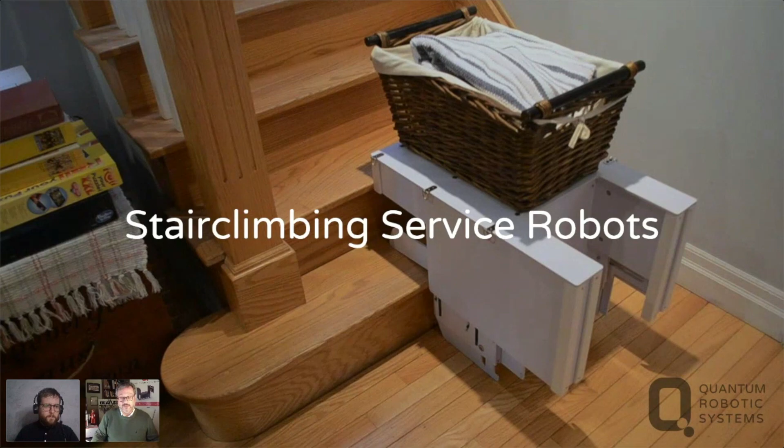Okay, so that's the topic I'm going to be discussing today, and the focus of our company is actually stair climbing service robots. So aptly enough, that's the name of the slide.

I'll give you a brief introduction to myself and Quantum Robotic Systems, about our history. I'll talk about our development history, because it's kind of taken a circuitous route, mostly because of the pandemic, and I'll explain what I mean by that. I'll talk more about our robotic stair climbing assistant, or Rosa.

You saw a picture of her at the opening, and that leads into the discussion of our newest robot, QB, a multifunction service robot. I'm going to take advantage of the captive audience to do a shameless plug for our ongoing Kickstarter campaign around QB, hope no one minds. And then open the floor for some questions.

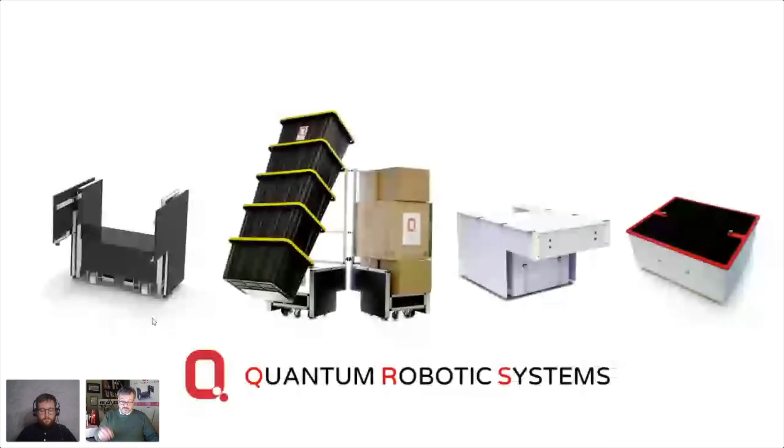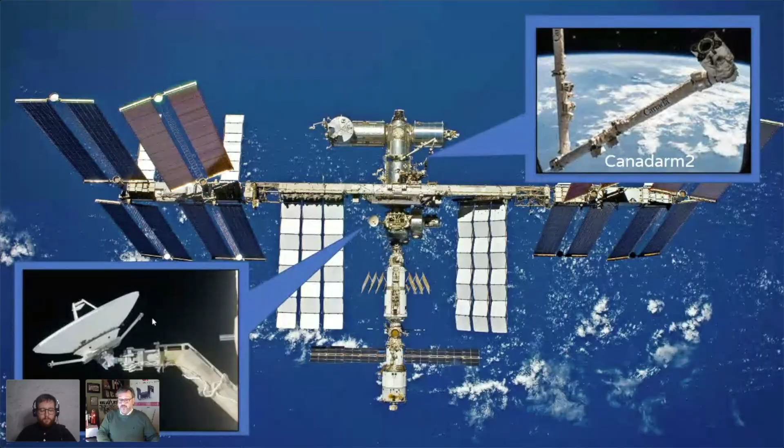After spending some time in the consulting wilderness, I had an idea for a stair climbing robot, and this is actually how I envisioned it. I put together this little video.

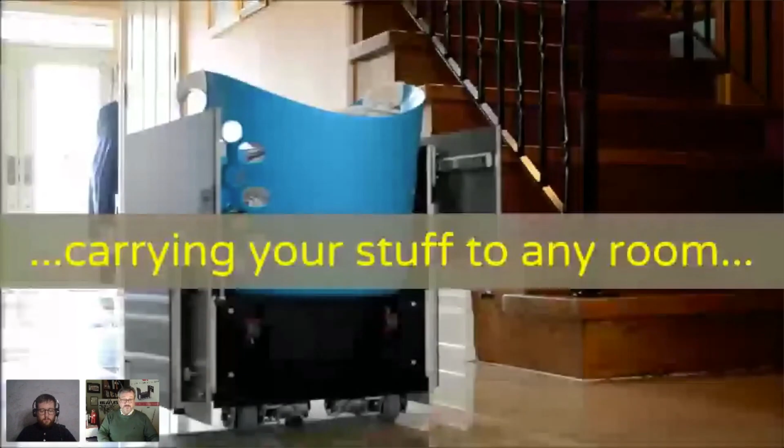This is actually one of our proof of concepts. But imagine a robot that actually greets you at the door, takes your stuff anywhere you want, including upstairs. So here it is taking some laundry upstairs for you. On that idea, the company was founded.

So a little bit about our development history, going from that initial idea. Again, our focus is on stair climbing service robots, and there are really two pieces to that equation: the stair climbing part and the service robotics part.

Our initial focus was on solving the problem of how do you climb stairs in a novel way to keep the payload level, and do it in a way that is basically mechanical, the simplest possible way that you can climb a set of stairs. So that was the challenge we set for ourselves.

And our first proof of concept, here it is, Step-E, is what you saw in the initial video. This was to prove the concept of the stair climbing mechanism.

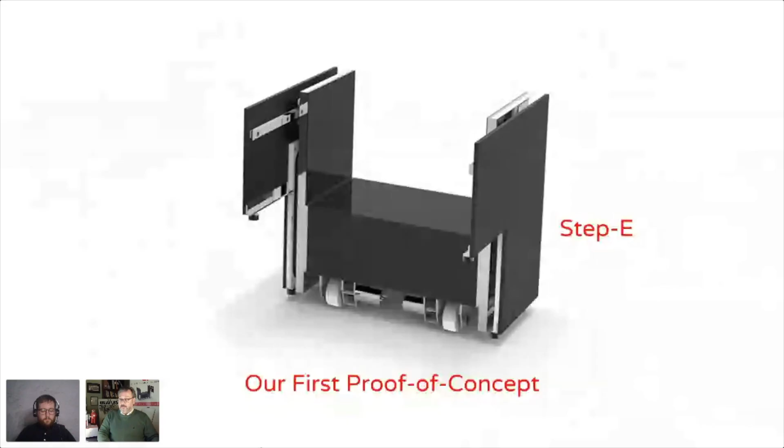We partnered with George Brown College here in Toronto, and they have an excellent Office of Research and Innovation. We've gotten together with them on a number of cases to develop prototypes.

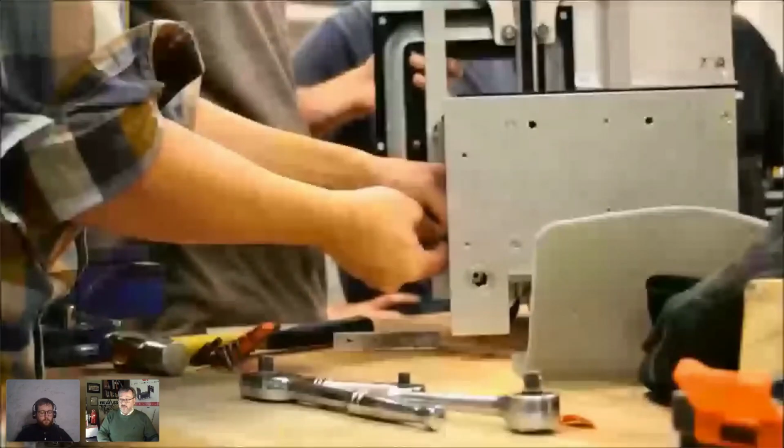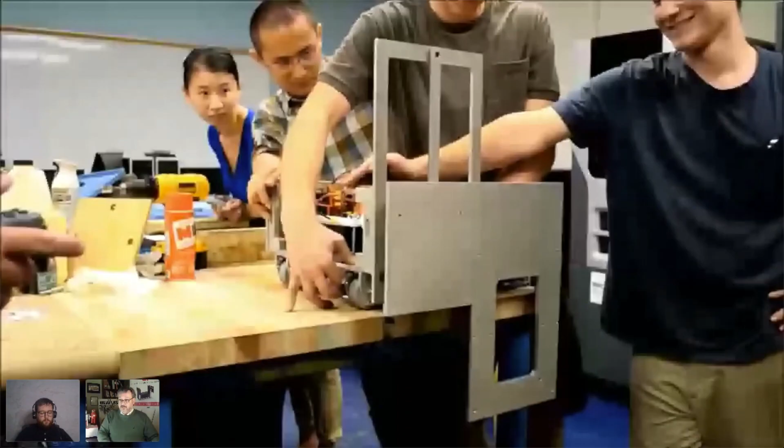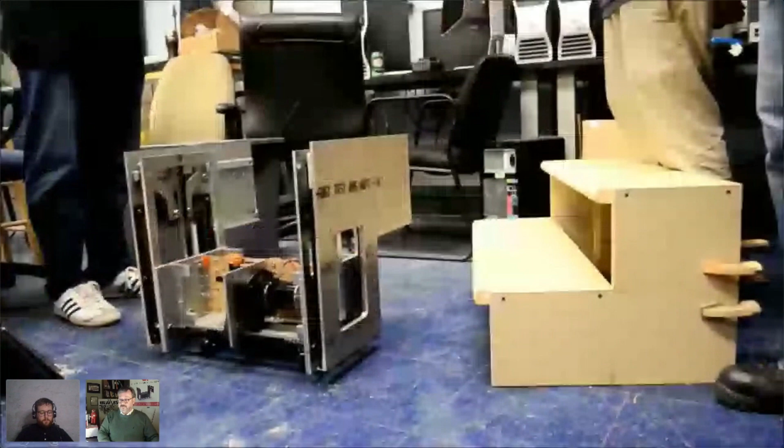So here's the development of the Step-E unit. This is the first time it was actually turned on, the first time it was tested, so it's literally taking its first steps in this video. This involved some third-year college students who did the machining and the integration. So yeah, this is a successful proof of concept of how our mechanism works.

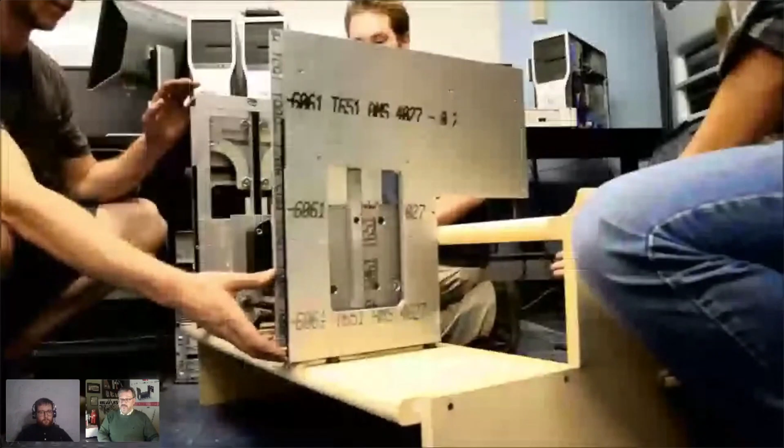And we took that and we've since patented it around the world. So our stair climbing mechanism is now the basis for a series of patents.

The real challenge here is when you're trying to develop a service robot that can potentially be used in someone's home, you're faced with a competing set of requirements that don't overlap necessarily. It has to be a capable robot, autonomous and useful, but at the same time small, compact, easy to use, and most of all affordable. The price point is a big hurdle—if you price it out of range of most homeowners, that market is shut off to you.

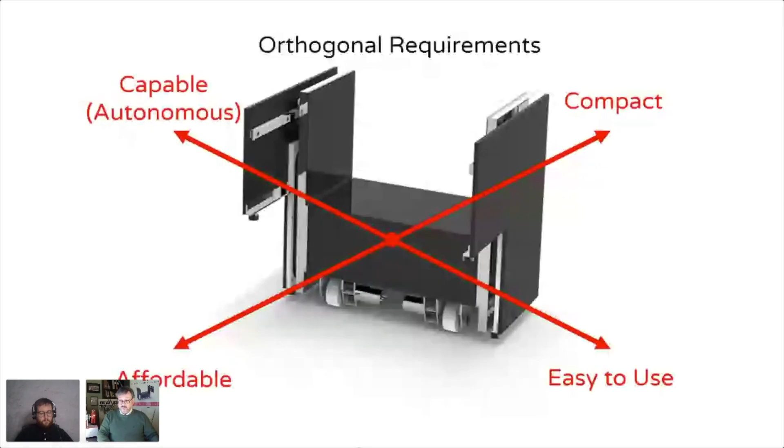So at first when we looked at this, we thought it's a really hard nut to crack. What is our minimum viable product after we develop this mechanism? So we decided to focus on the stair climbing part, not the robotics part. We put the robot aside for a while and decided to focus on the mechanism.

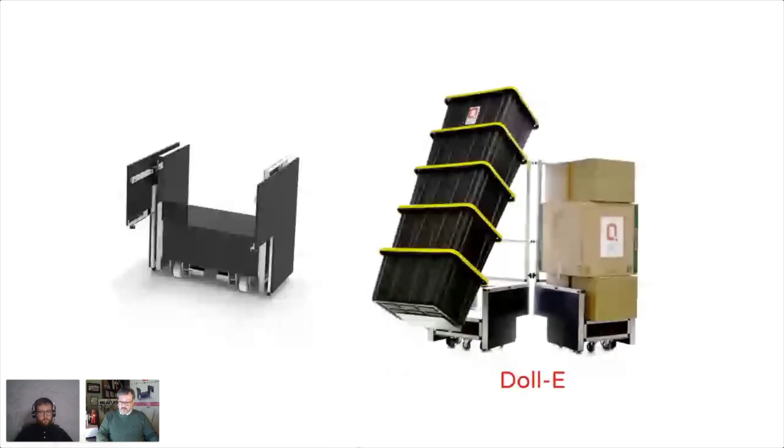This is Doll-E, a stair climbing moving cart. We took the mechanism we developed in STEPI and scaled it up to see how much we can lift and how much we can help people in the delivery industry, the moving industry, and logistics. I have a video that shows you Doll-E going through her paces.

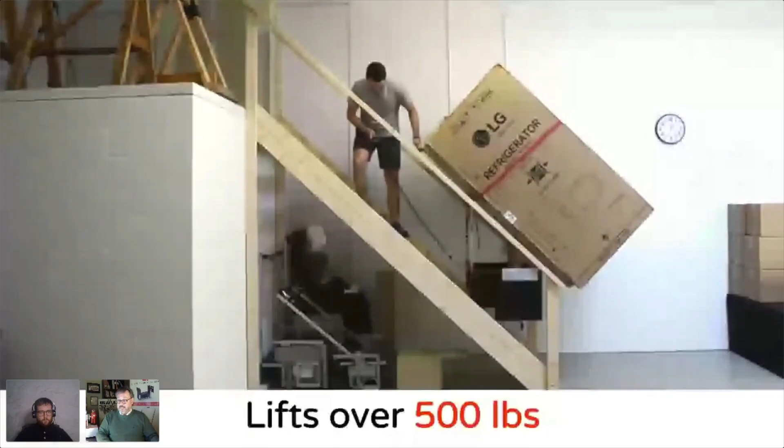It's meant to roll like any other cart, except when you get to a set of stairs, it climbs. And it's meant to carry pretty much anything, including a refrigerator in this case. We tested it up to 500 pounds.

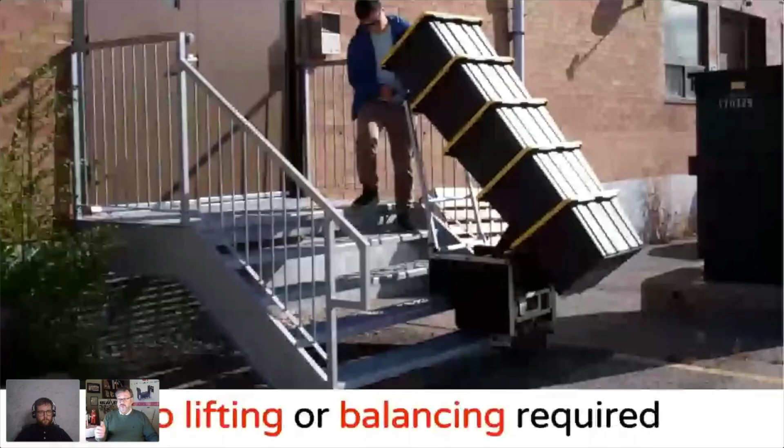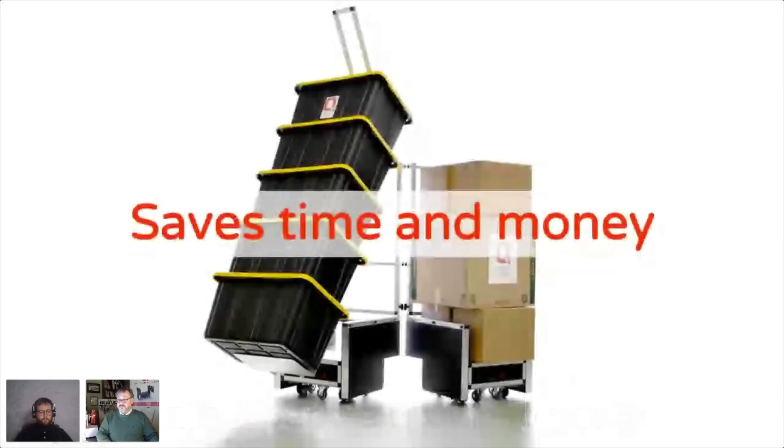We were able to demonstrate that the machine can save a lot of time and a lot of injury, and our primary focus was the moving industry. We showed business cases to a number of large companies, showing that they can cut back on their crew sizes by a factor of a third. And it saves a lot of downtime.

One of the biggest problems facing the moving industry is labor shortages related to injury, and people not coming back to work because it's just too tiresome a job. It's just too brutal—you have people barely 30 going in for back surgery after working in this.

We were all set to go. We had lined up our initial customers in the moving industry. We were about to negotiate shipping units, and then that happened—the pandemic hit, and basically the bottom fell out of the moving industry.

It's really tough to move when you can't get into people's homes. Talking to the president of the Canadian Association of Movers, I think at the beginning of the pandemic they took a 40 to 50% hit. So nobody was buying any capital equipment, nobody was interested in evaluating a new robotic stair climbing cart.

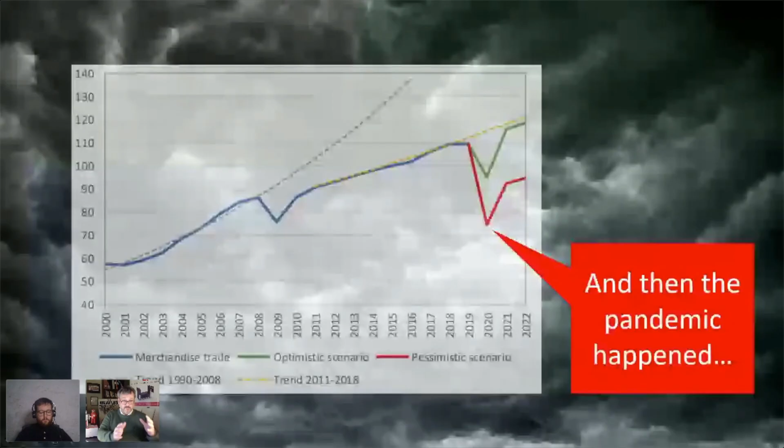So Dolly was put into pause mode. And what do you do when that was your first minimum viable product to launch into the market? Well, you do what everybody else does, and you pivot. We had our robotics work on the back burner, and we quickly moved it to the front burner, focusing on the other side of that equation—making a good robot.

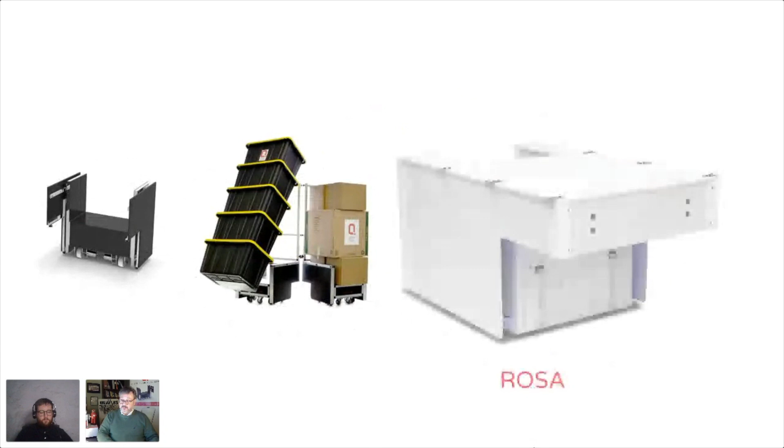So along comes our next prototype, which is our robotic stair climbing assistant, or Rosa. We developed Rosa primarily for people who need help navigating their stairs. You can imagine seniors who want to age in place in their homes longer—they need help navigating stairs, which explains why the Acorn stair lifts are so popular.

That's one of the primary reasons why people end up leaving their homes, is because they can't negotiate stairs while holding on to things. So beyond that, just the convenience factor—if you had something somewhat bigger than a Roomba that can also carry your stuff up and down stairs, that's what we're aiming for.

So we come full circle back to our Steppy concept. In this case, a person is loading her up with laundry, app-driven controller, and she autonomously goes up and down the stairs. Eventually she'll self-navigate wherever you want her to go. We have a control app in development that lets the machine navigate from room to room, including paths that include stairs.

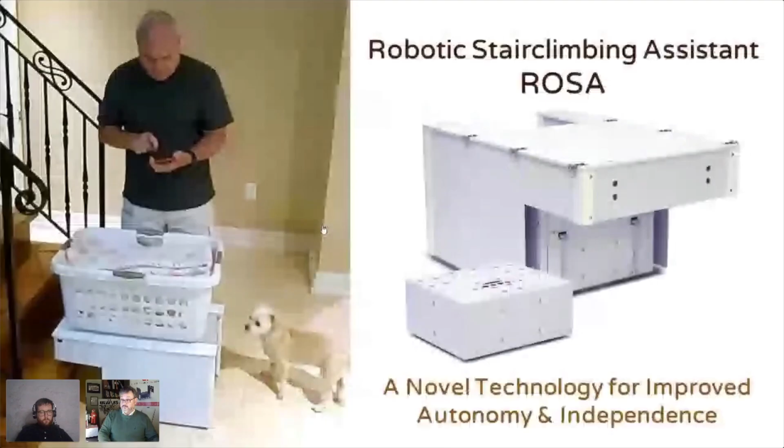I think somebody asked, what about going downstairs? Yeah, you're right, you're very perceptive. Going up is easy compared to going down. One of the things we've done in the last 12 months is focus on that very problem.

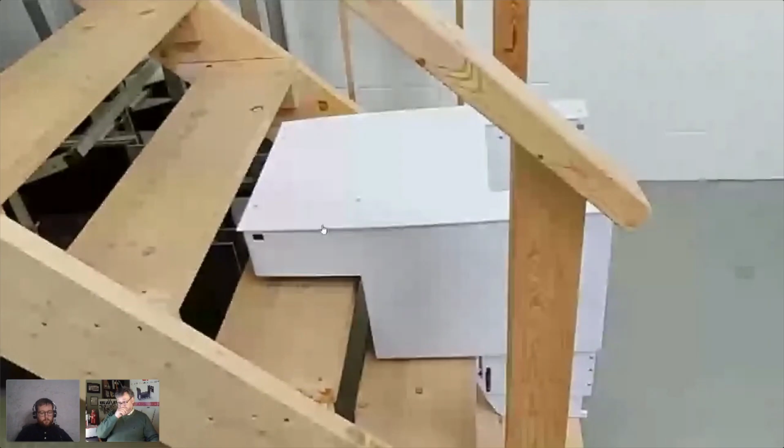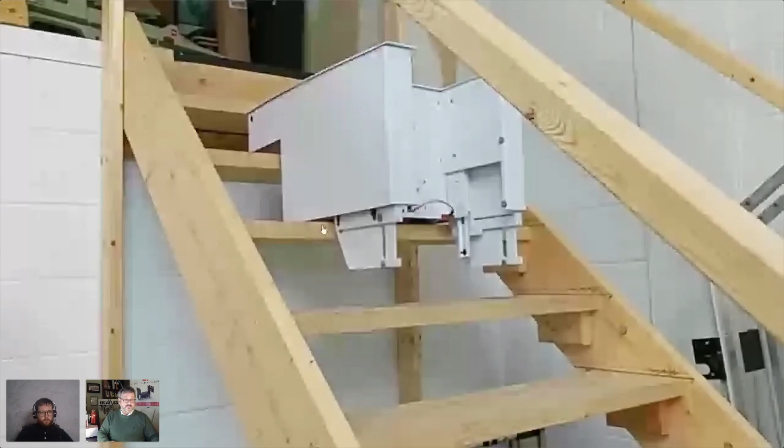This is a sped up video, but it shows Rosa tackling an entire staircase and stopping for a brief moment at the top and then coming down. This is a continuous shot, just sped up, using edge detection sensors and its mechanism to re-register itself on the edge of the stairs. So yes, it goes up and it goes down.

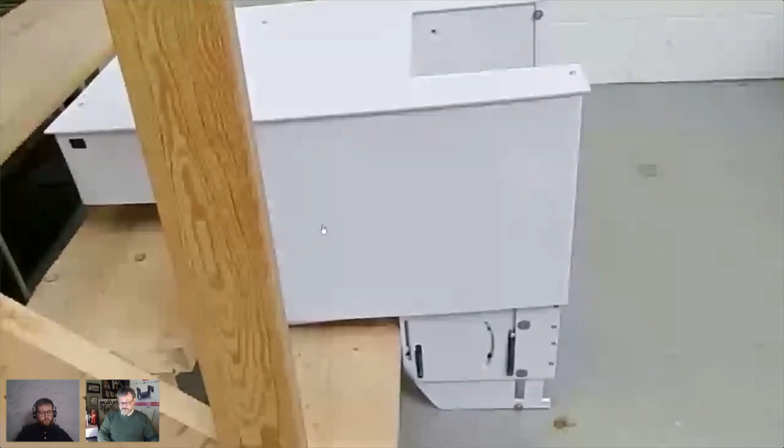So we had some fun, and this brings us to why we're on BlogTO and City TV. It was part fun and part R&D. Outdoor stairs are a lot more challenging because they wear unevenly, they can have chips out of them, they can have debris on them. So we wanted to challenge ourselves and say, can we climb exterior stairs as well?

So we brought the machine out to various outdoor staircases, starting small, and we culminated in a visit to Casa Loma's Baldwin Stairs. I'm not sure if you're familiar with them—it's a set of 110 steps, I believe, right at the base of Casa Loma.

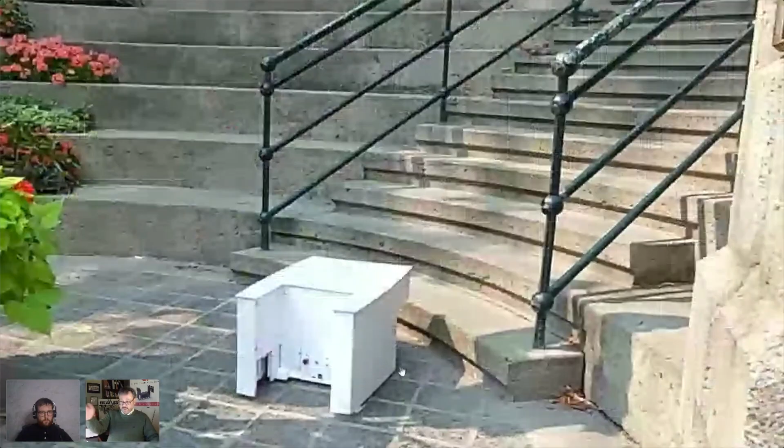We did it in a series of segments, but she climbed the entire set and descended in one battery charge. We were trying to stay out of the way of pedestrians while we were doing it. And it was a blistering hot July day that we did this on, but she performed pretty admirably.

Once we completed the Baldwin steps, we wondered what else could we do? I've always wanted to enter Rosa in the CN Tower Climbs for Charity. I think there are 2 per year, and it would be a cool way not only to get some promotional value, but also to raise some money for, I think it's United Way has one, and World Wildlife Fund has the other. So we're going to be in touch with them to see if we can get some sponsorship behind Rosa climbing the CN Tower. So look for that next year, hopefully.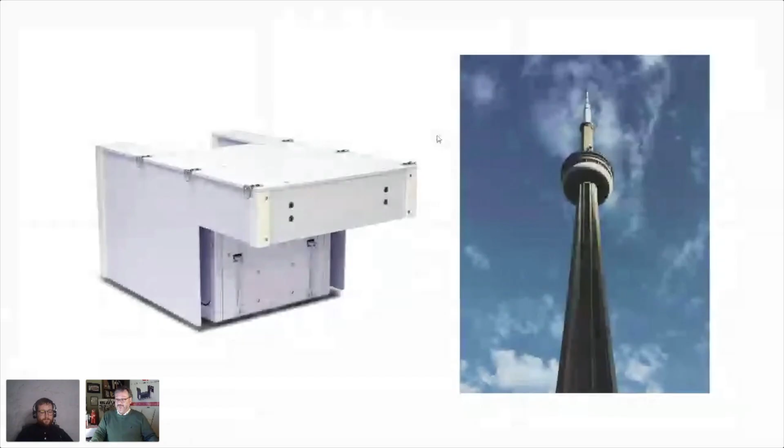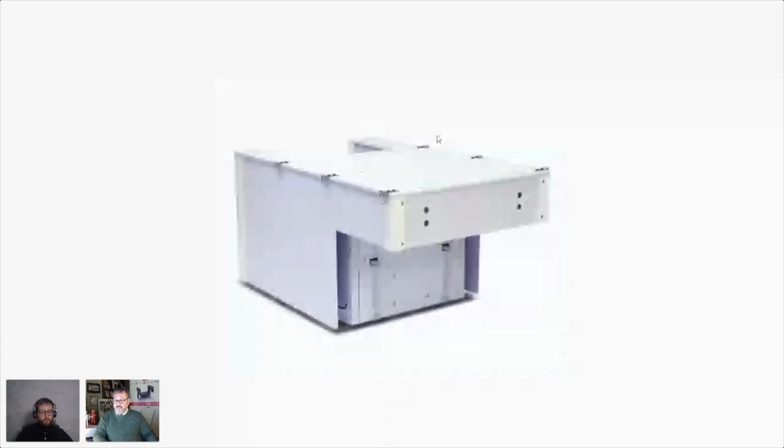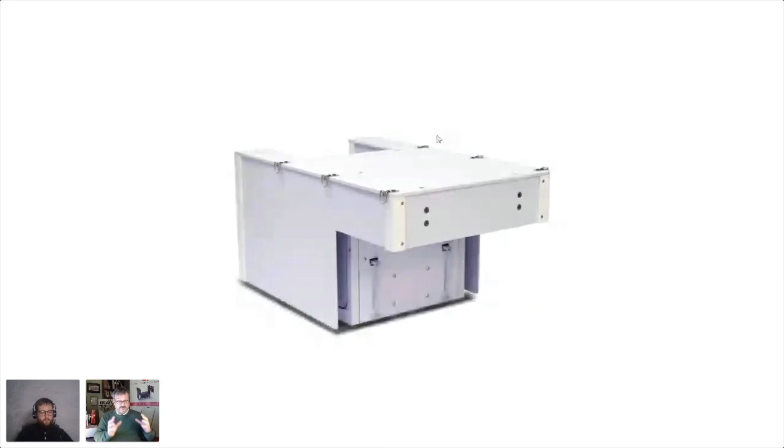This brings us to our latest robot, QBii, a multifunction service robot. QBii is related to Rosa in the sense that when we designed the Rosa device, it was deliberately segmented into 2 main modules: the climbing module, which is the shell you see on top that contains the mechanism that actually climbs the stairs, and the bottom portion, which is the drive module. It's the actual robotic part, the one that takes the machine from place to place. We reasoned that it's actually a robot in and of itself. If you don't need to climb stairs, it's a highly useful robot on its own.

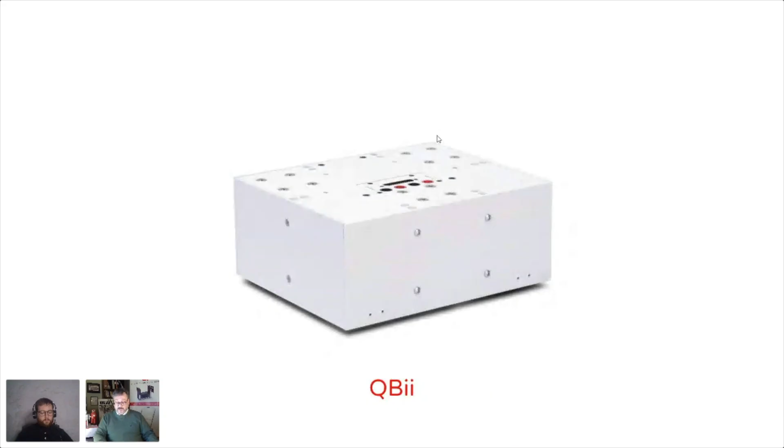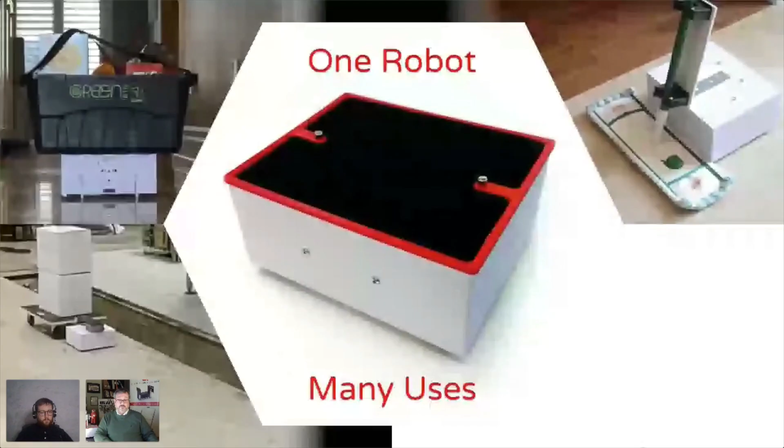So this is our new nearest-to-market product because it's derived from Rosa. It's fairly good to go. This is its latest iteration, and I'm going to show you excerpts from our Kickstarter video because it gives you a nice highlight of all the capabilities. We like to tout it as a multi-use robot, a Swiss Army knife of robots, if you will.

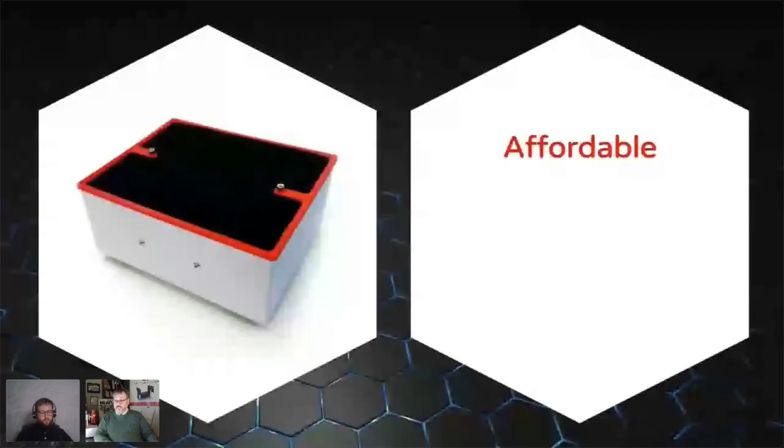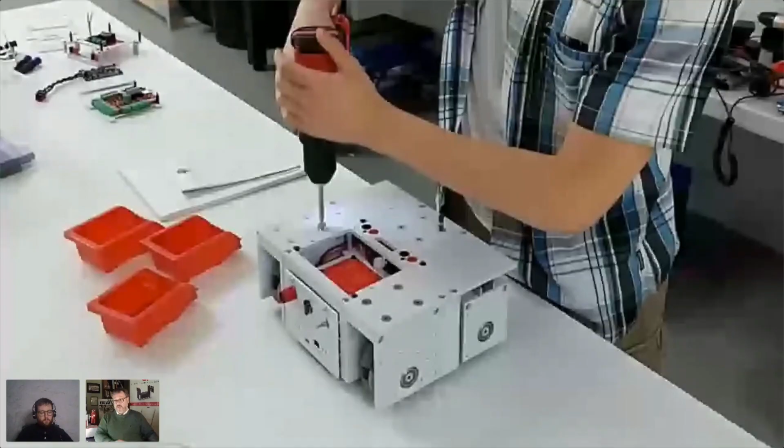So we hit the target of those orthogonal requirements: it's compact, it's affordable, but it's highly capable. It can do multiple jobs, not just one, and it forms a central module of Rosa. It's expandable, you can make your own project on top of it, which is ideal for makers or STEM educators.

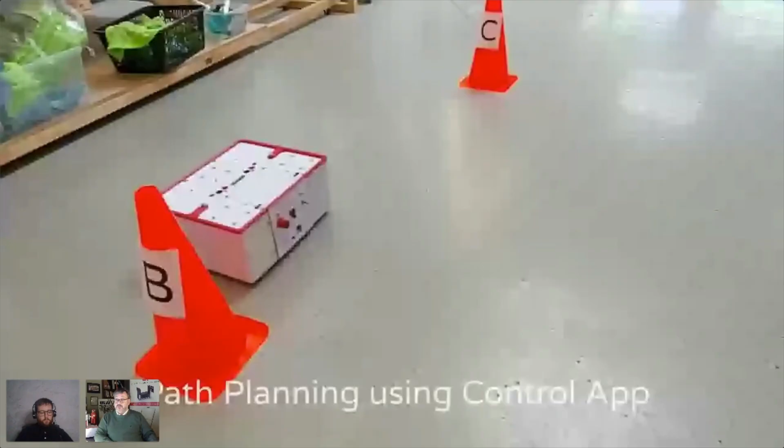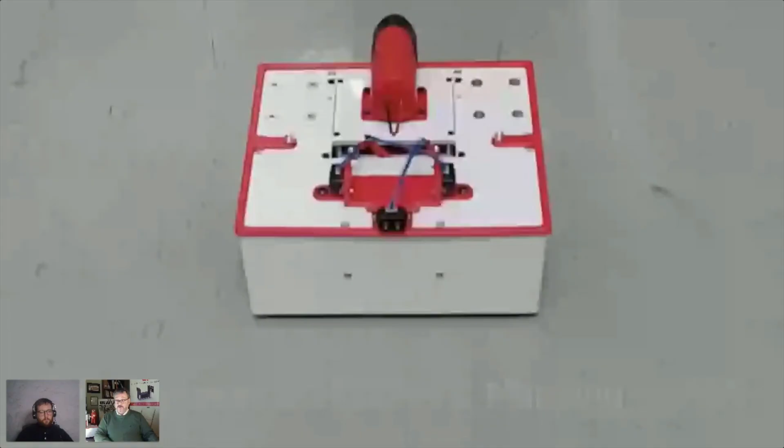So you get a better sense of its size in this photo. It runs with a control app that lets you program paths. It uses internal odometry to measure its position in the world, but we also included LiDAR, single point LiDAR sensors, an array of 3, and we could do things like generate point clouds and do SLAM navigation.

For a little robot, it has a very large carrying capacity. We've tested it up to 50 pounds. Here it's carrying water that weighs about 30 pounds, and it's delivering from door to door in our facility using the indoor navigation capability.

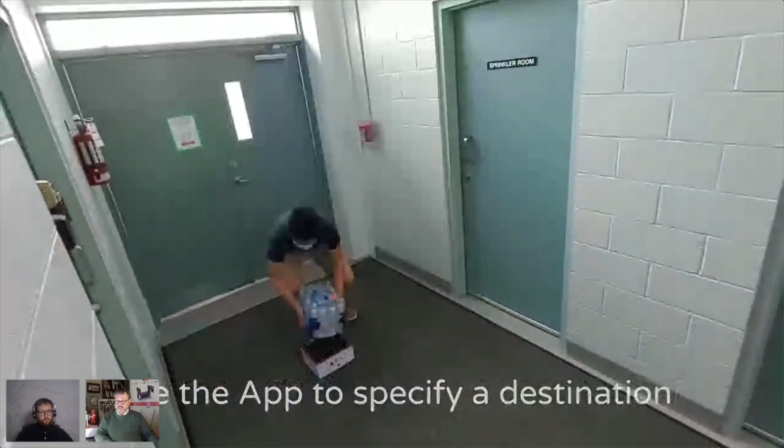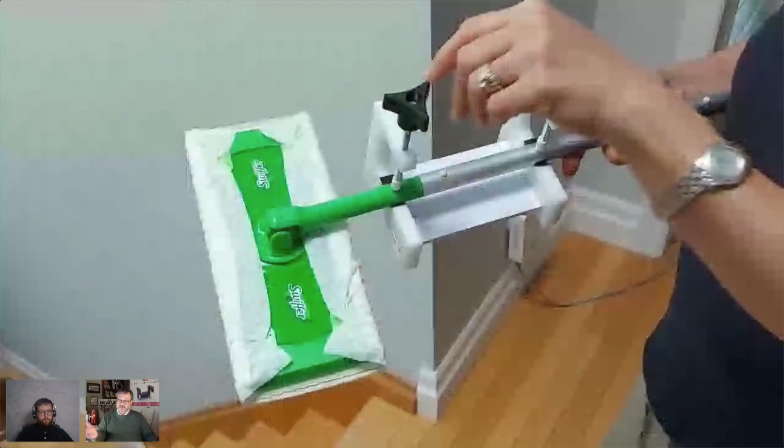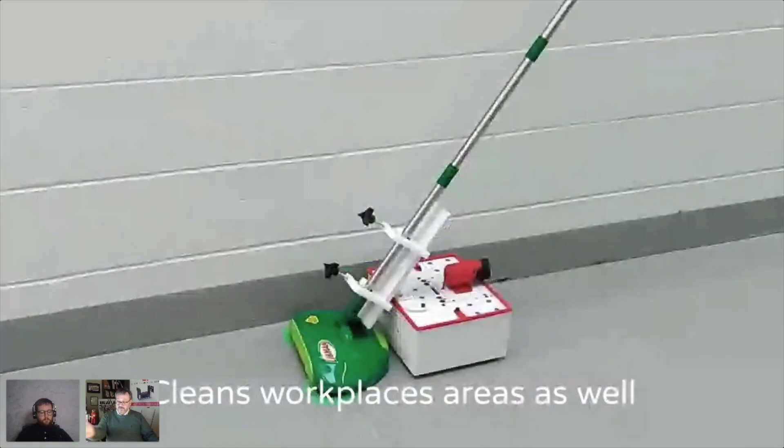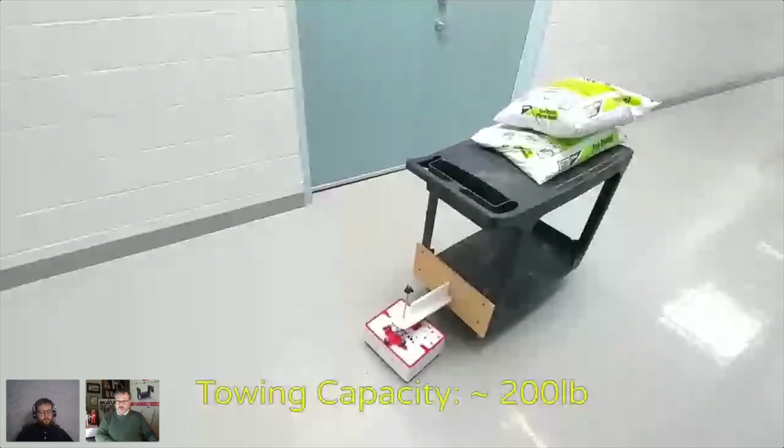It wouldn't be useful if it couldn't clean floors. So here it is executing pre-programmed floor cleaning patterns. The advantage here is you can attach whatever your existing mop or Swiffer or whatever this is - we try to identify what that is. We've experimented with wand vacuums. With our tow hitch, you can actually turn any utility cart into a robotic cart. We've tested it up to a 200-pound load, which is remarkable for a 9-pound robot.

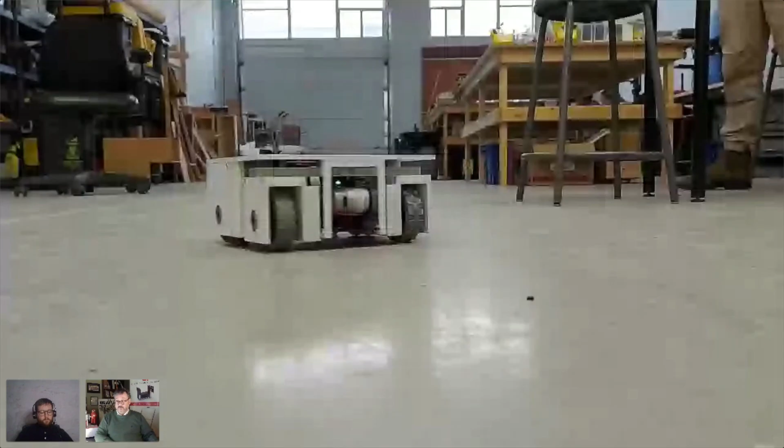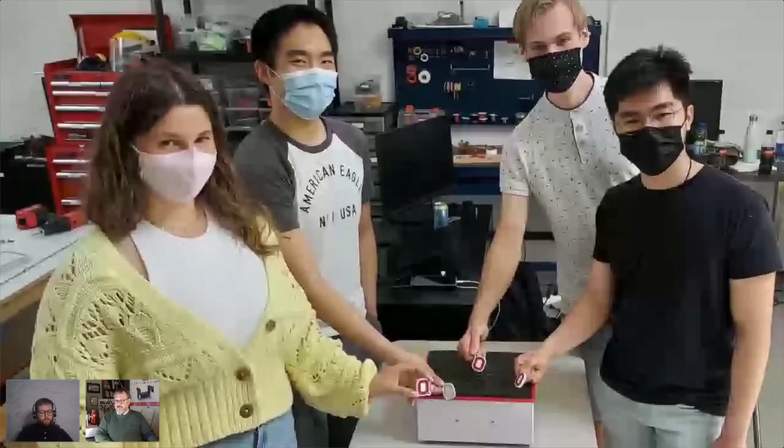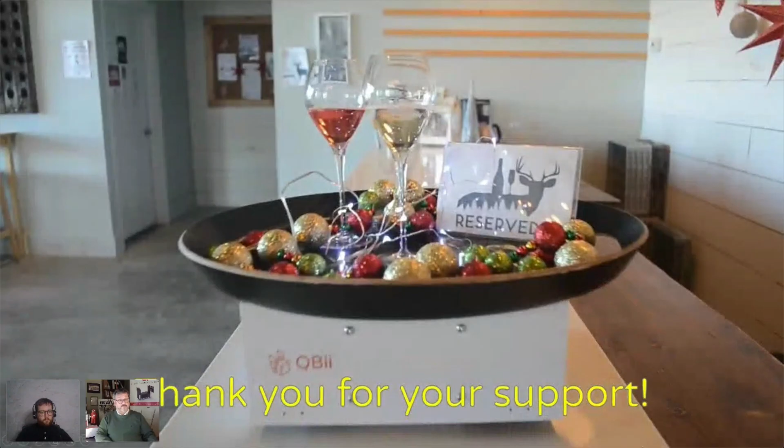This shows some of the team putting the pieces together. As I said, it's currently on Kickstarter. Part of our campaign is we're offering packages where we will donate QBii units to schools if we get to certain pledge levels. Again, building on the fact that it's an expandable robot that you can customize, you can also build it from a kit if you want the fun of putting it together.

So we think we've kind of found that balance between all those competing requirements in QBii. And of course, because QBii is a central module within Rosa, Rosa will inherit those capabilities when it all comes together.

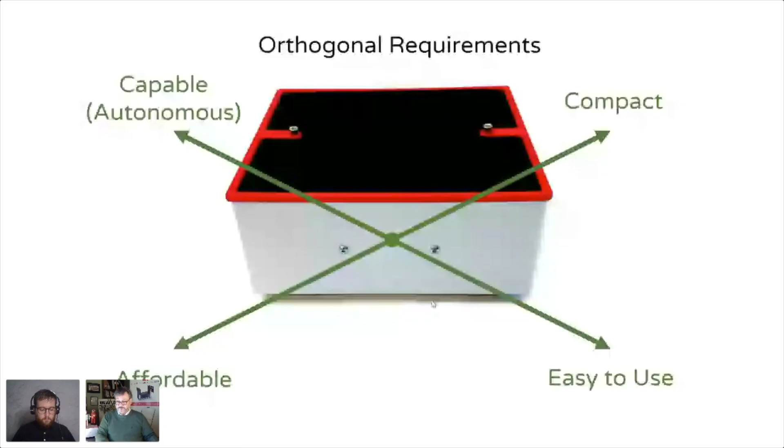What we're working on now is enhancing the control capability. Within the next quarter, we expect to have this functional, where from our app you can command the robot to go point to point, room to room, destination to destination within your home, within your company, what have you, so that it's a seamless interface for the person using it. If you want the robot to go to the bedroom, press bedroom, and it'll go there.

This will require an integration of the single point LiDAR array, but we're doing it in a way I like to call 'SLAM light' - a very thin, lightweight way of surveying its environment. Again, we're using an ESP32 processor that runs the robot, so there's not a lot of computing resources available for it on board.